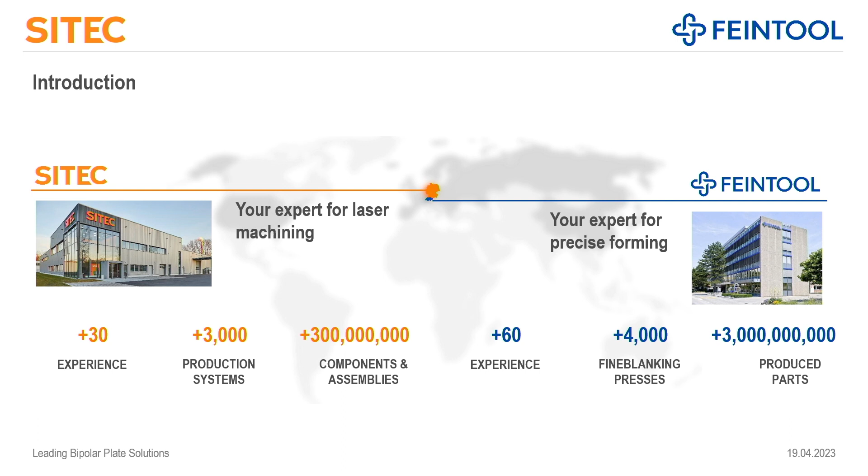Who is SITEC? SITEC is a medium-sized company from Germany. We started more than 30 years ago as a design office and have developed into a globally operating production company. We are producing machines and we are producing parts in large quantities. With our 300 employees, we run facilities in Germany, in China, and in the United States. Our core competences lie in automated assembly and laser manufacturing of automotive and medical components.

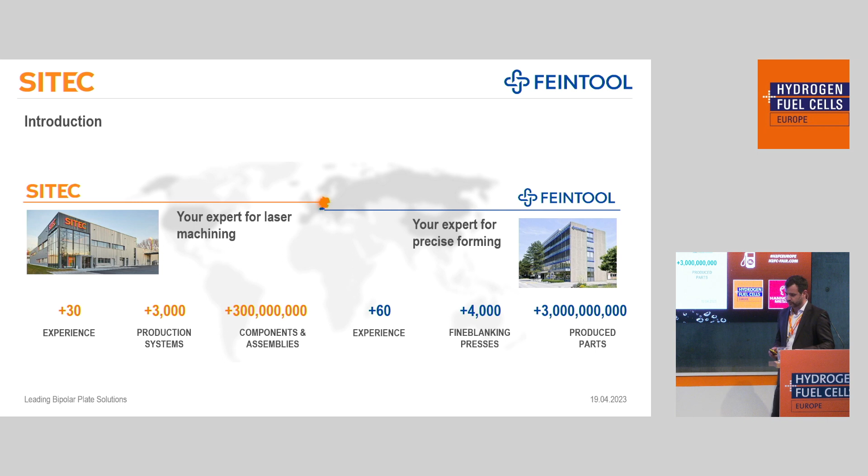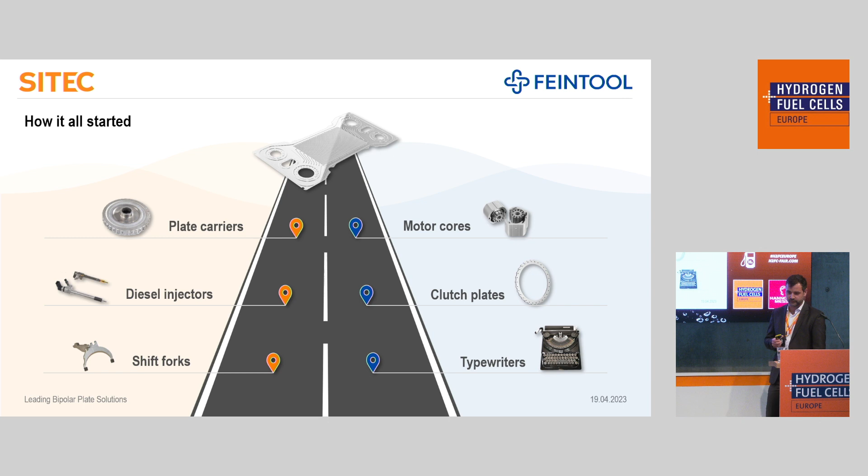Unlike Feintool, we did not start with typewriters because typewriters were already outdated when SITEC was founded. So we focused on machines and components for internal combustion engine-driven vehicles. You see their shift forks, for instance, used in automatic transmission systems. You see their laser-welded gears. You see their diesel injectors, where we delivered machines to produce a lot of sub-assemblies for this. We also focused on any kind of pump, like cooling water pumps and gasoline pumps in the past.

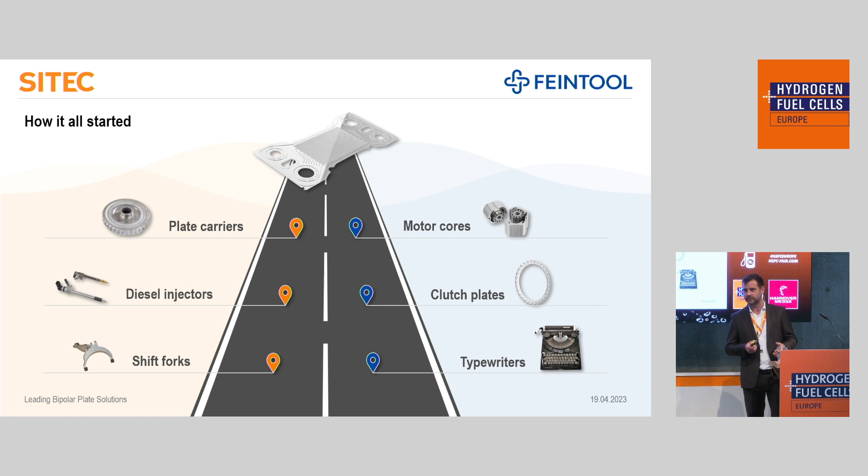Now we all know that internal combustion engine cars might not be the future anymore, so we had to find new business fields. For us, hydrogen application seems to be one of these, and we are quite sure about this. So today we want to talk about our hydrogen activities.

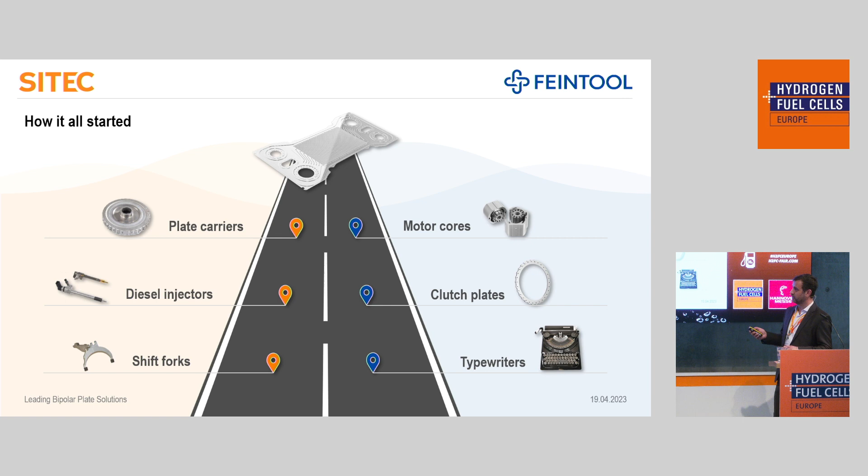We did not start thinking about hydrogen activities today. We built our first machine in 2006. It was a machine for the laser welding of metallic bipolar plates, and we have delivered several laser welding machines so far. Since 2012, we are producing SOFC interconnects at our facility in Chemnitz and also PEM bipolar plates in large quantities. We are doing this on our own equipment, so we are a machine building company, but we are also a producer. And there's of course a need to develop ourselves, to develop our laser technology, to develop our machinery.

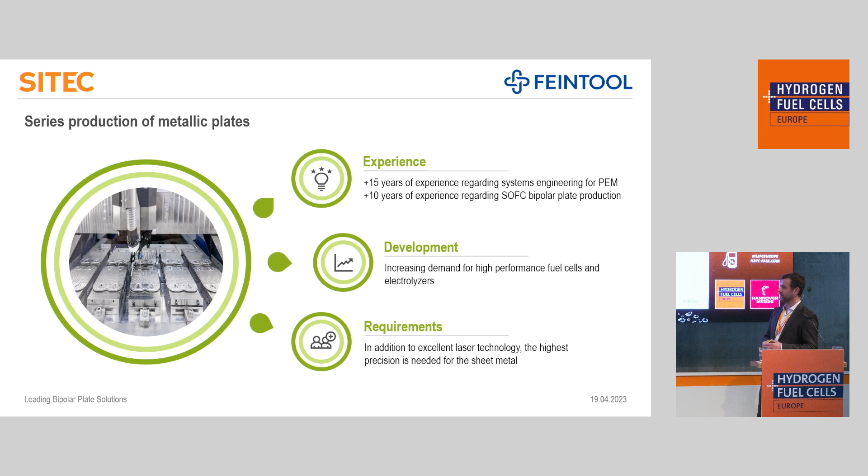In order to do this development, we need raw material, we need parts, we need precisely formed parts. As SITEC alone, we are just one part of this process flow, so we are happy to team up with Feintool because they are the experts for the fine forming of thin metal sheets. So now we are going to look at how this works.

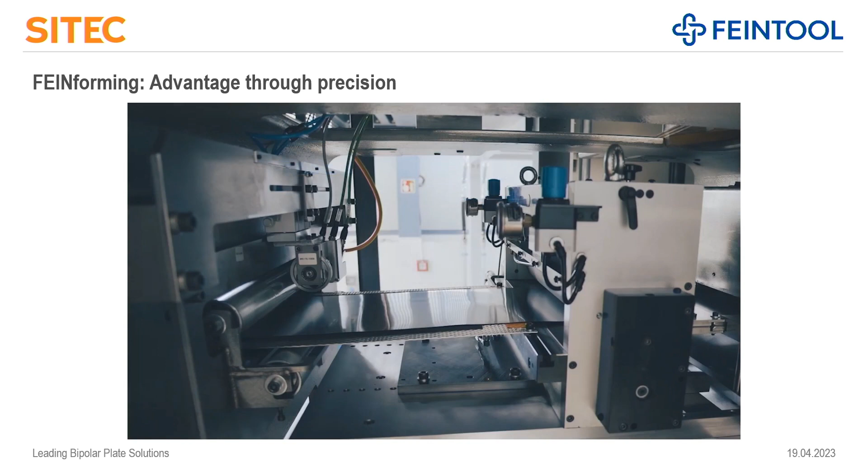You're going to see a video about the FEINforming process. First, you see the latest generation of fine blanking press, FB1. You will see it's installed in our headquarters in Switzerland in the tryout area, running our own development plate, demonstrator plate in a demonstration tool.

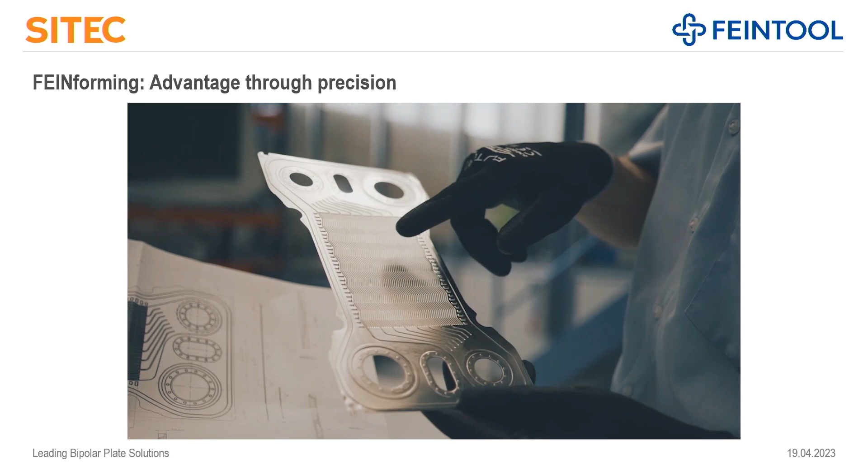As you can see, those tools are very compact in size, and we are working in a minimum amount of production steps. Now we are going to focus on one important aspect: the accuracy of those plates.

So when you take an anode and a cathode and you weld them together, it's very essential to have flat, also big flat surface areas, and also a very good alignment of those parts to be able to weld them.

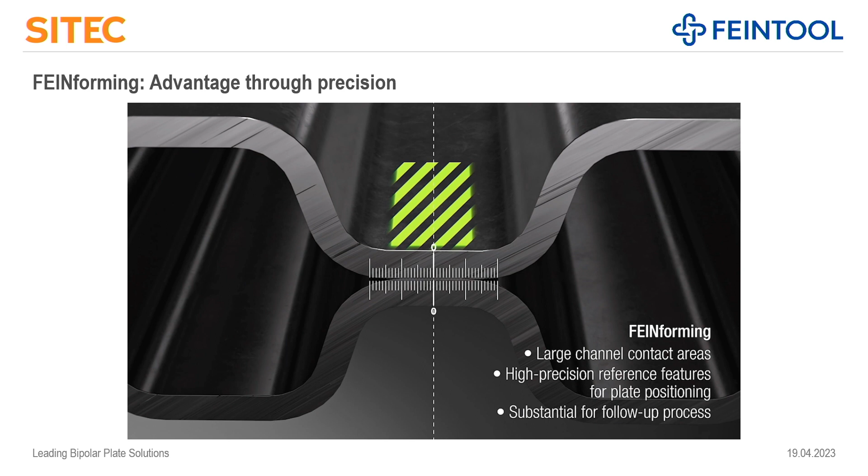On the other side, the stack does care about other features of such bipolar plates. A very uniform, homogeneous channel height is very important for the stack function, so that every channel has really the same height. And on the other side, that we achieve a very uniform material thickness after the forming.

So the more uniform this forming can happen, the more you can reduce the thickness of the material, and by that save weight and also money.

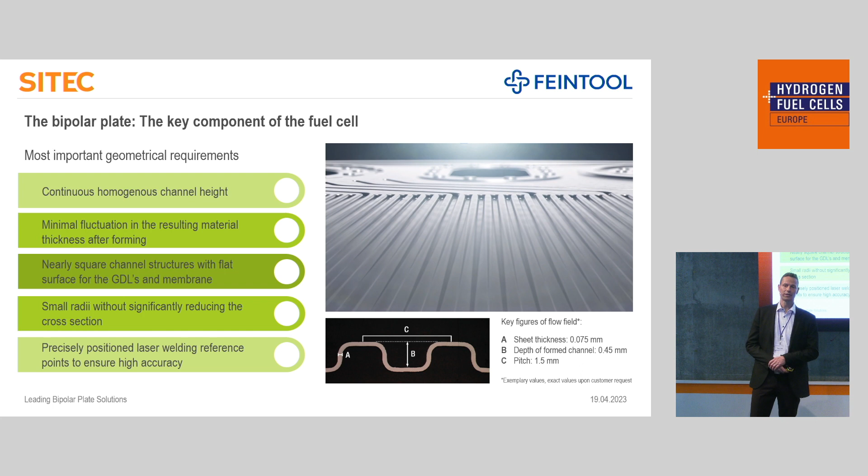Additionally, we are very close to square channel structures with small radii, which is very good for the function of the stack, and as already mentioned, those reference geometries for the laser welding. So how to achieve this?

One aspect is force. As we work with high forces, even for those very thin metal parts. Here you see an example for a 300 square centimeter plate, also active area of the plate, in which around about 720 tons are used in the coining stage in order to get really the full flat surface of the coins, and not a round shape at the end.

In order to achieve this, it's also very important that these coining elements have a very good support in the press. So we work on small tables in a very central position, on very rigid presses.

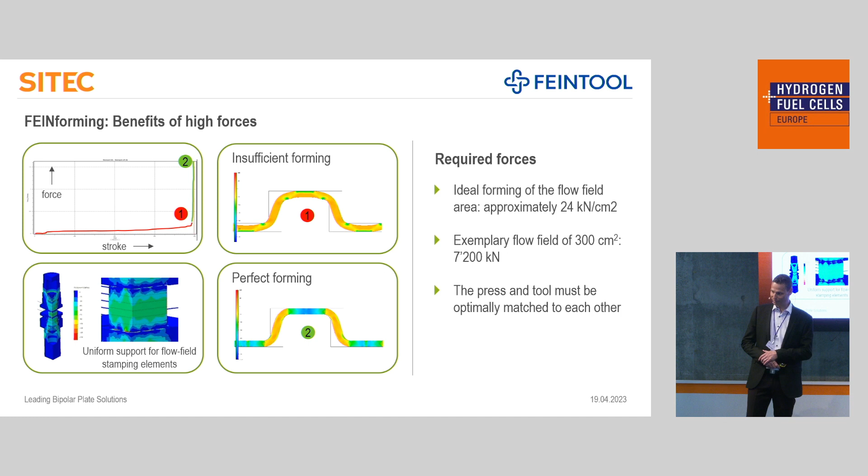Actually, you can visit us on our booth. We have half of the tool here. So if you're interested, you can have a look at it on how this looks in reality.

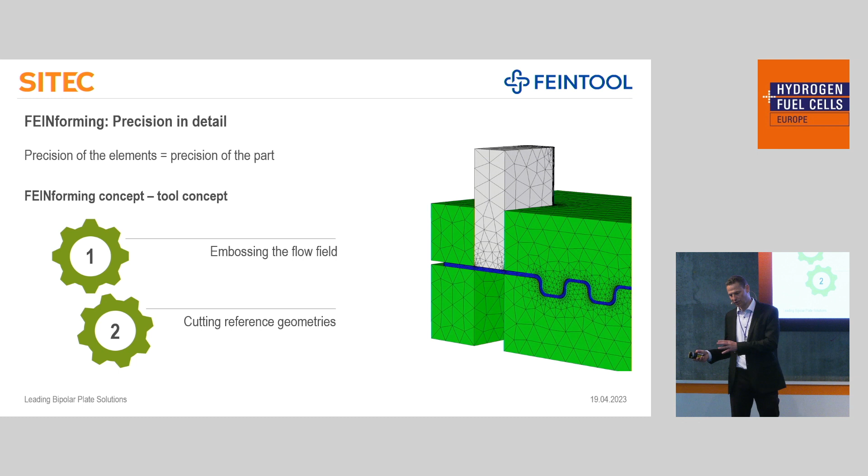Another aspect is the tool concept as such. So we do combine many forming steps and cutting steps, or operations, better said, also forming different areas, as well as cutting inner forms and reference geometries in just a few steps compared to other processes.

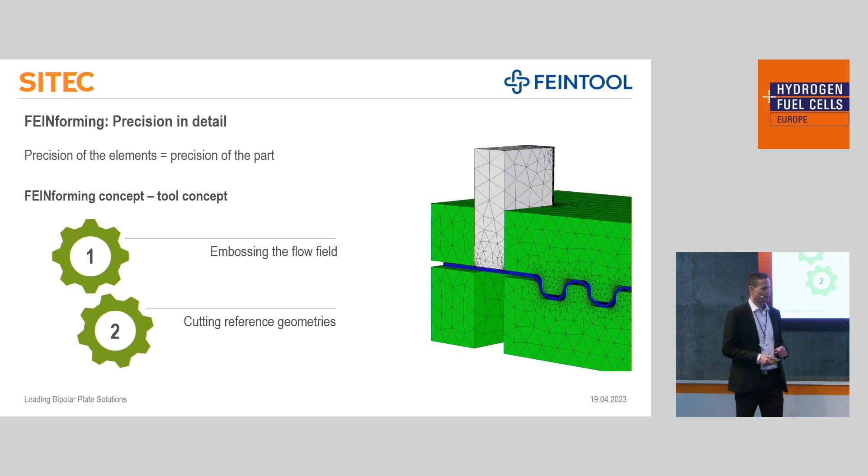And very essential and pointed out here is that the final shape of the flow field is given really at the same stage as the reference geometries. By that, those two elements in relation to each other are as accurate as the elements which form them. This is really where we bring also benefit back to the laser welding.

Let's have a look at the flex welding and what makes it flexible. Back in the 2000s, our customers required machines which were used for prototyping, which were used to define welding strategies, laser parameters, and so on.

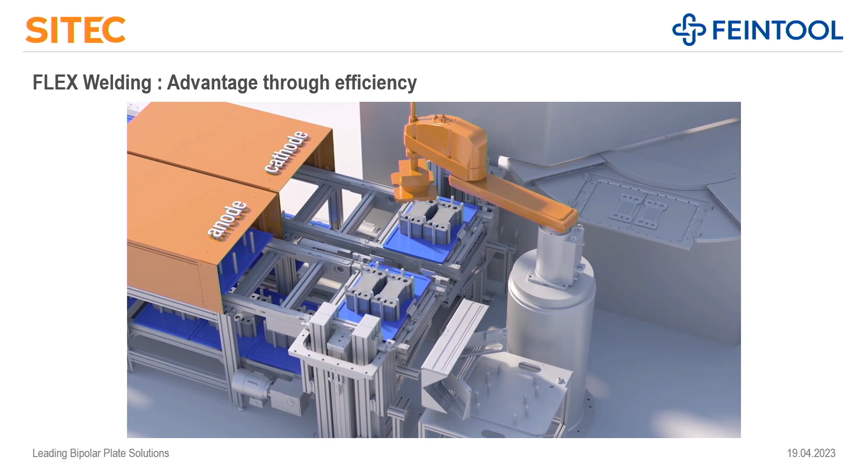With the flex cell system, we developed a machine in 2020 which is able to produce several millions of bipolar plates per year.

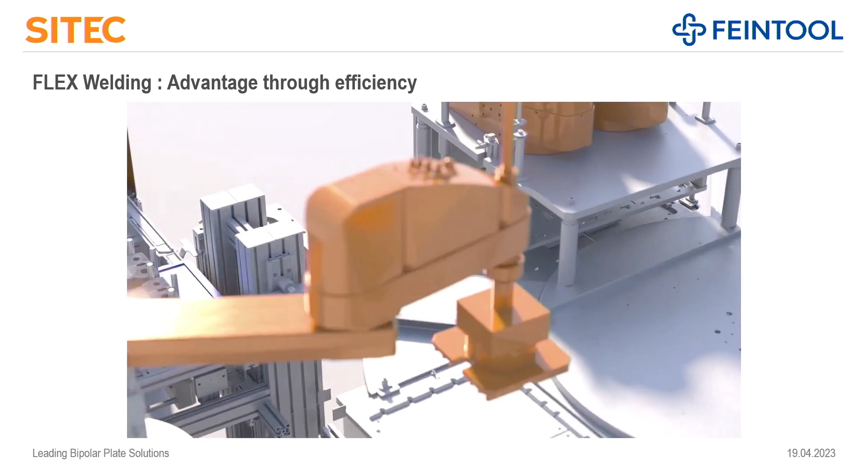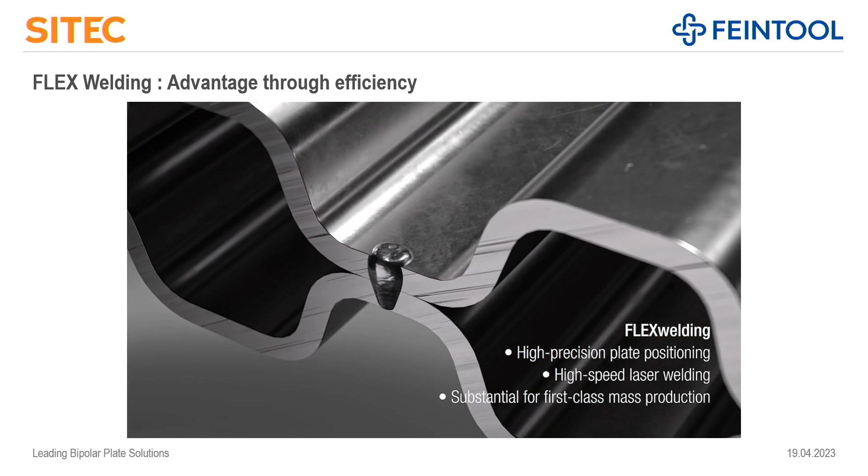With the combination of laser sources and optical components, we are able to weld any welding geometry. We are able to weld several dimensions, so we are quite flexible in terms of the welding, but we require high precise formed metal sheets in order to make the best use of the channel. What we require is a flat channel and a zero gap between the two plates.

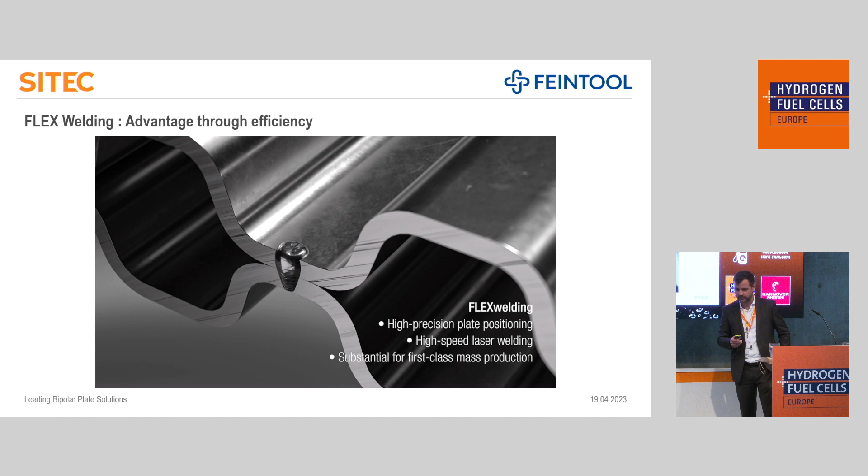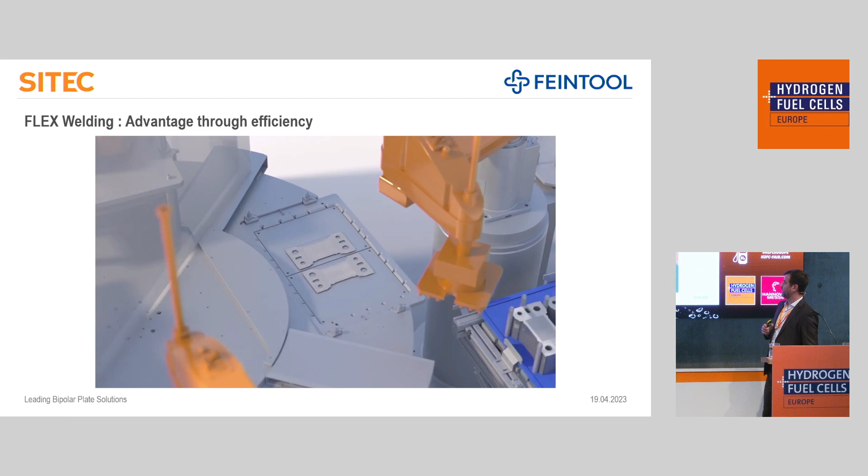So with our flex welding, we are relying on a two-step welding process. Everything runs fully automatic. The parts are handled by robots, and all the welding operations are followed by a leak testing and an optical inspection.

Here you see two typical weldings performed by our flex cell. First of all, we have to create a leak-proof outer welding seam around the bipolar plate, and very often we also have to do some spot welding within the flow field, where there is not much space for clamping and welding itself. You can see the little red spot within this green flow field geometry.

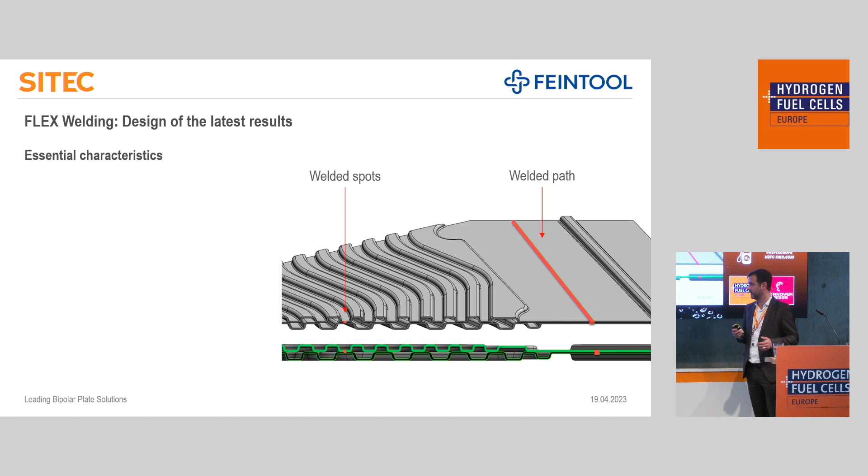So this area has to be very precise because we need it for the welding, for the positioning of the welding seam, and we need it for clamping. We have to create zero gap between the two plates, otherwise we will make holes, and instead of laser welding we will end up doing laser cutting.

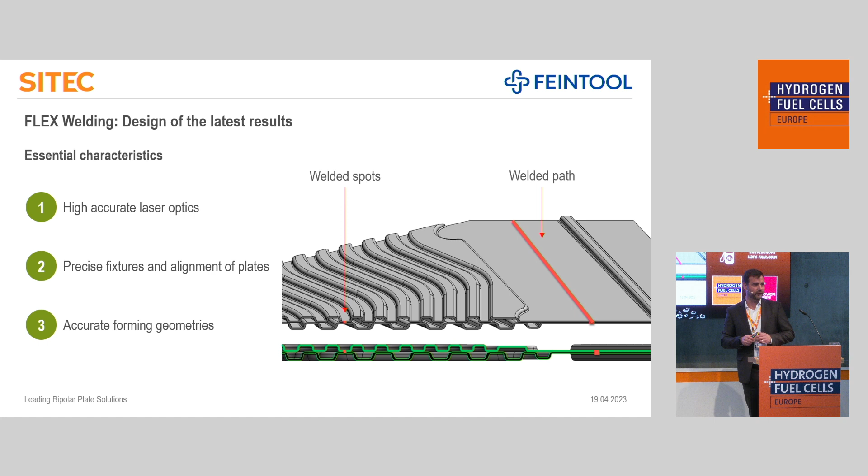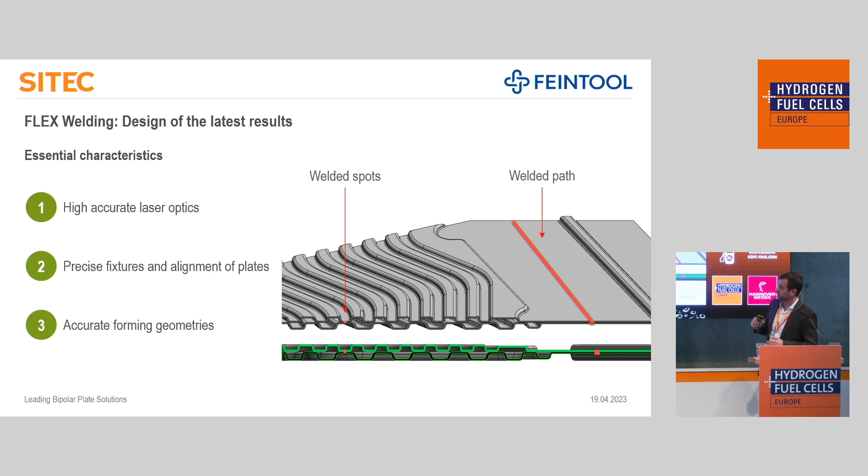So what is essential for us? First of all, we need highly accurate laser optics in order to position the beam directly where we want to have it. Then we need precise fixtures and tools to align the two plates - they are not welded together, they are single, so we have to align them together within the fixture. And last but not least, we need very accurate formed geometries, and those are supplied by Feintool - Peter already explained how they do this.

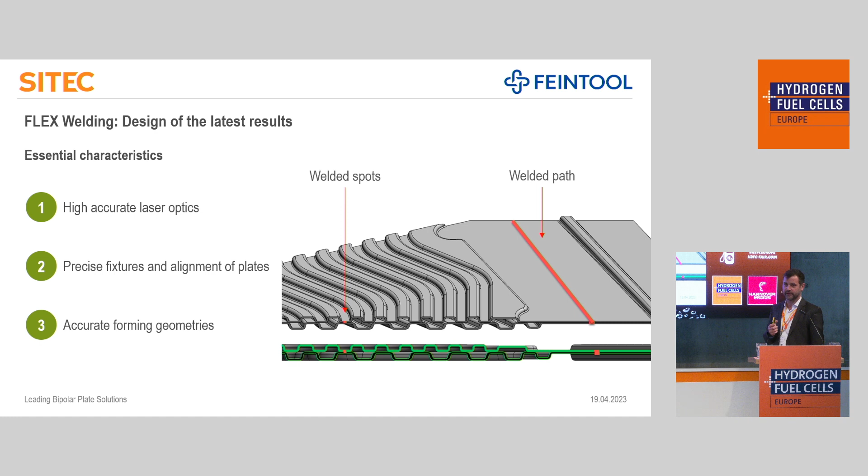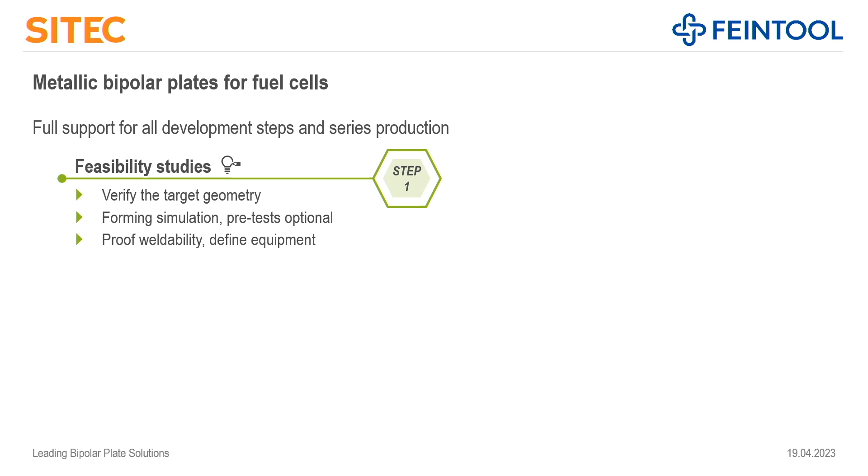So now let's look at typical development steps in a project. First, there's a feasibility study performed by both companies together. We look at the forming and welding aspects together, and I think that's a benefit of the cooperation, because usually these two elements are treated separately.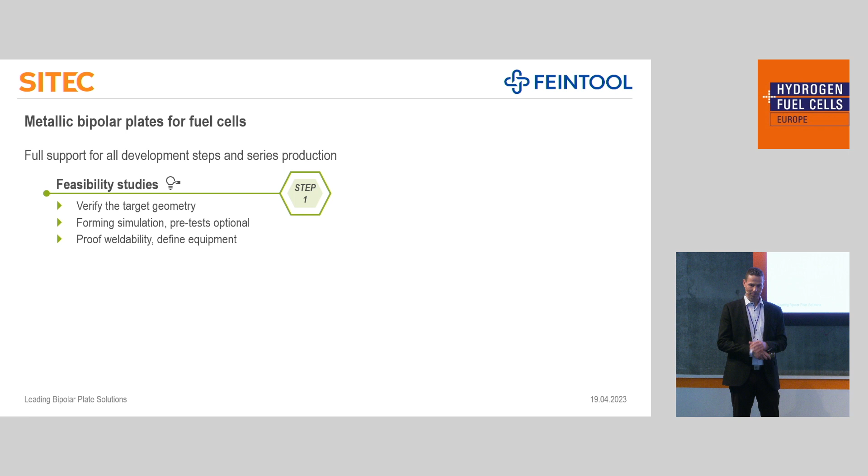Here the target geometry is verified. We can run simulations, and if required, pre-test on smaller geometries to avoid building directly the bigger tools with higher costs. This prepares for the prototyping stage, where plates are actually produced, manufacturing processes are validated, and the customer can test those parts in his stack to get functional feedback and acceptance.

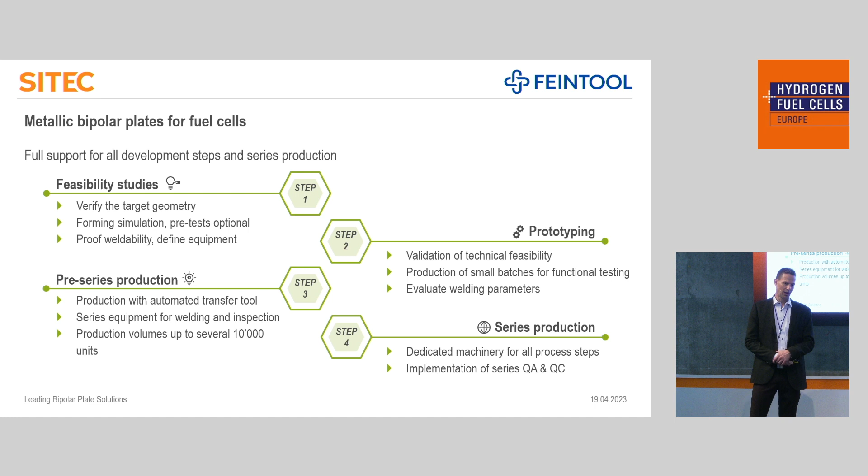Based on this, a pre-series production can happen where automated tools are used, and for welding and inspection, serial machines are used. Here we can already deliver up to several ten thousands of plates to build more stacks and prepare for the final step of serial production, where for every process step, serial production machines are used and full quality assurance and quality control is implemented.

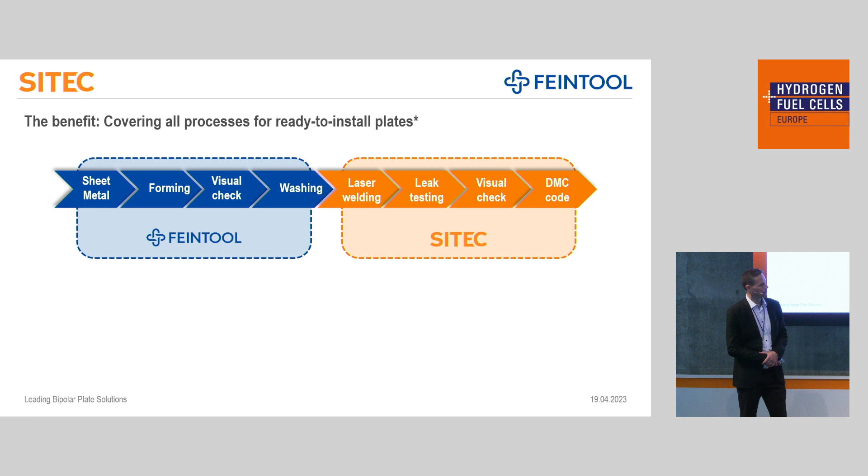So a typical process flow: everything required to produce anodes and cathodes is handled by Feintool. All the laser welding applications, the leak testing, the visual inspection, and the marking with a DMC code for all good parts - this is covered by SITEC.

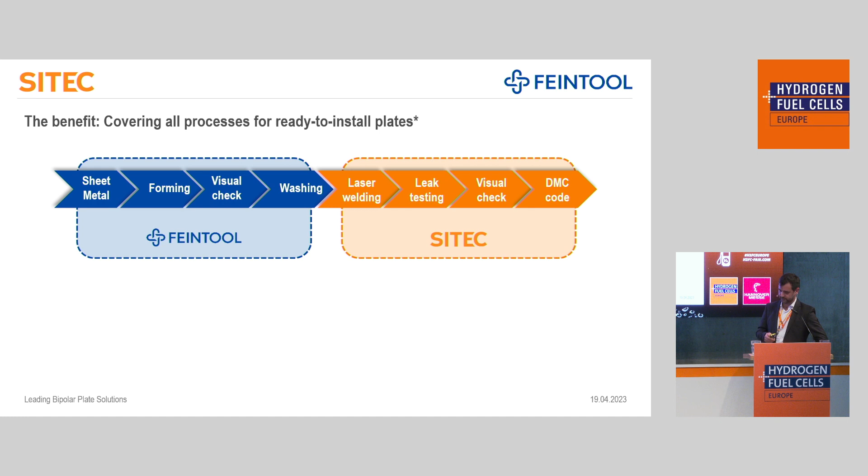We have to make sure the adjustment between forming and welding is perfect, because otherwise we won't be able to deliver perfect quality. This is assured by our cooperation between SITEC and Feintool. Additional processes like coating and sealing can be implemented project-specifically, as there's not one standard which fits all applications.

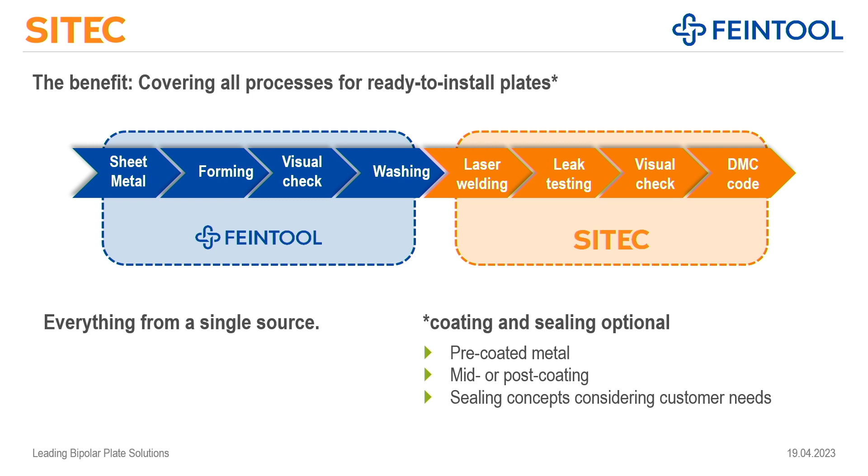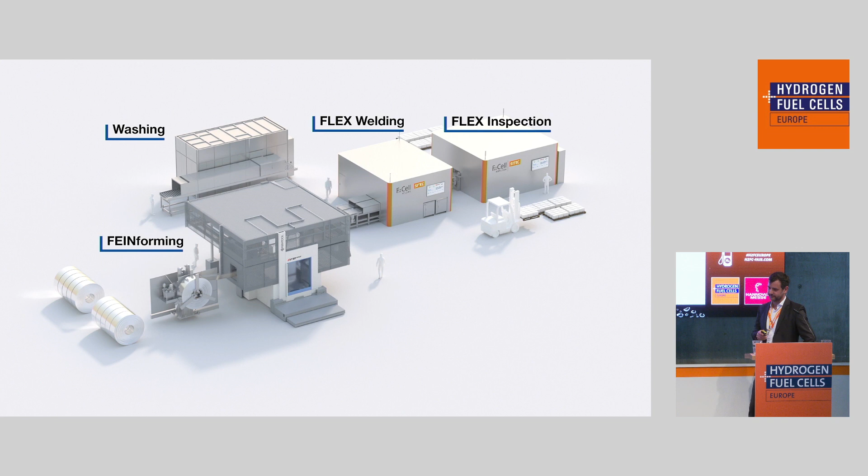There you see a visualization of our plant we are actually building in Taicang, China. By the end of this year, all this will be running. We will use our own equipment to produce several millions of bipolar plates starting end of this year, 2023. So to close the circle from the beginning of the presentation, together we will bring metal bipolar plate production solutions starting in Asia, Europe, and then hopefully the whole world.